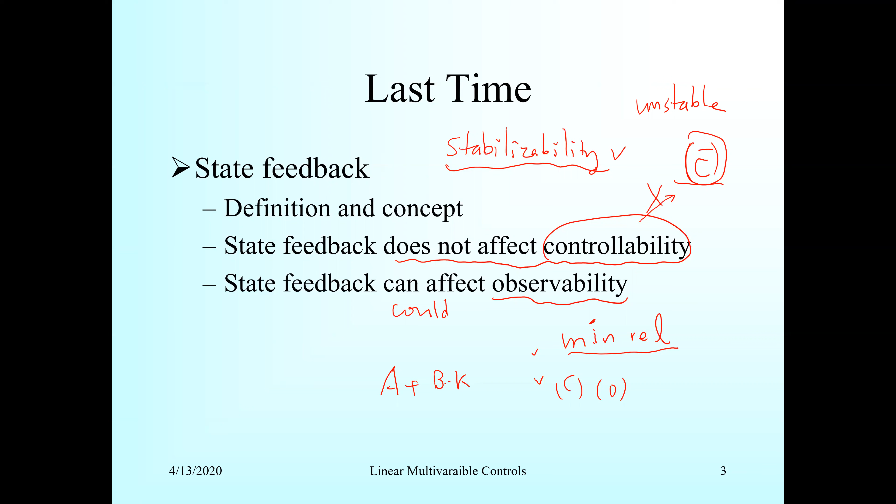So to talk about stabilizability: if you have A plus B K, the state feedback U is K X, how do you know that the K exists such that the overall closed loop system poles can be placed anywhere you want? The existence of such K relies on an assumption that the system is fully controllable and minimum. If we don't say minimum, then controllable is not enough, and you still have to say stabilizable.

That is already implying that your C-bar subsystem is stable. Then the overall system can be said to be stabilizable. I hope I'm not confusing you. So let's move on to pole placement.

Pole placement means you have state feedback, the whole state is available for you to do the feedback. But what if the full state is not available? Then we need to introduce observers.

In control, there are actually two steps. When you develop something, you ask: is this state feedback, or still feedback control? Then you should say output feedback. It turns out that output feedback is much harder than state feedback. On the other hand, state feedback is the foundation, so you have to know this one first.

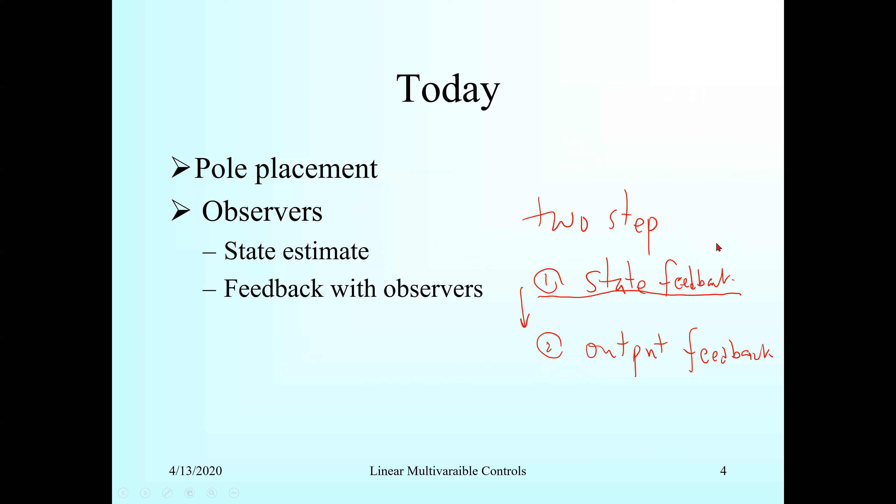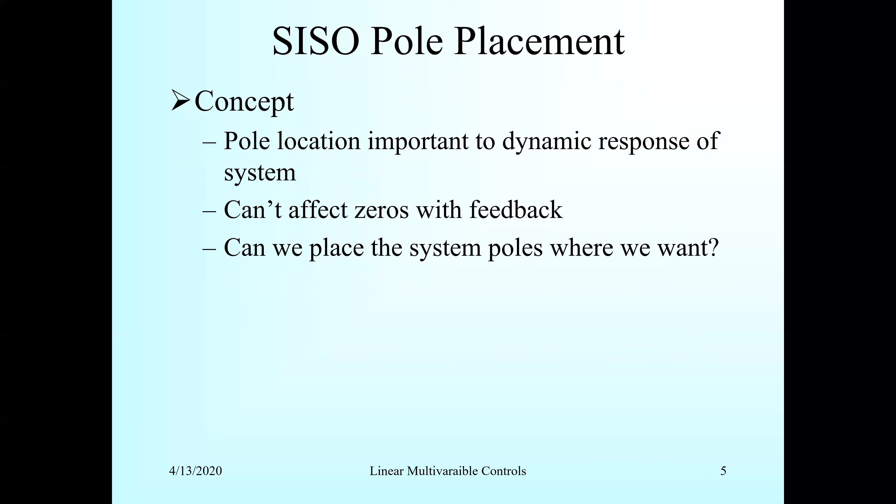Let's go to SISO, single input single output, case first. The pole location is important for the dynamic response of the system; feedback cannot affect the zeros, I already see that. Can we arbitrarily place the system poles? These are the questions - the same ones we should answer for the MIMO system.

So state feedback in the MIMO case: there are so many flexibilities there, because of the MIMO, you have lots of feasibilities. This is a journal called Transactions on Automatic Control, it's the number one journal in control.

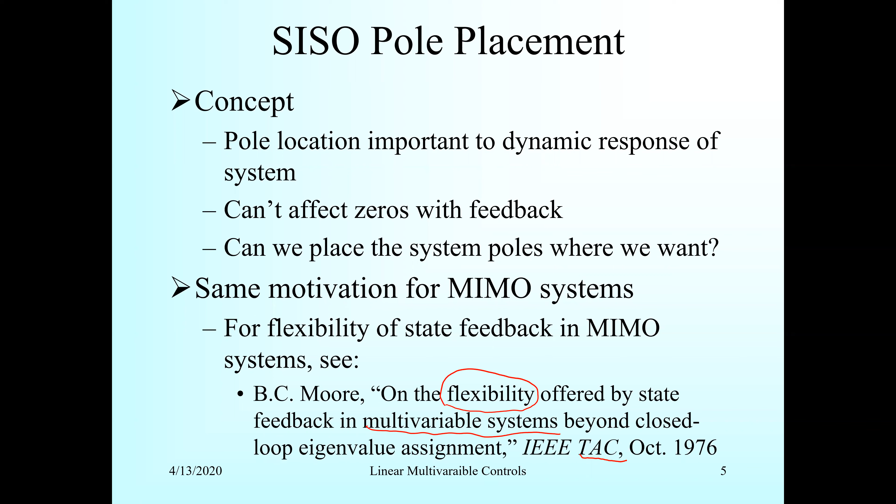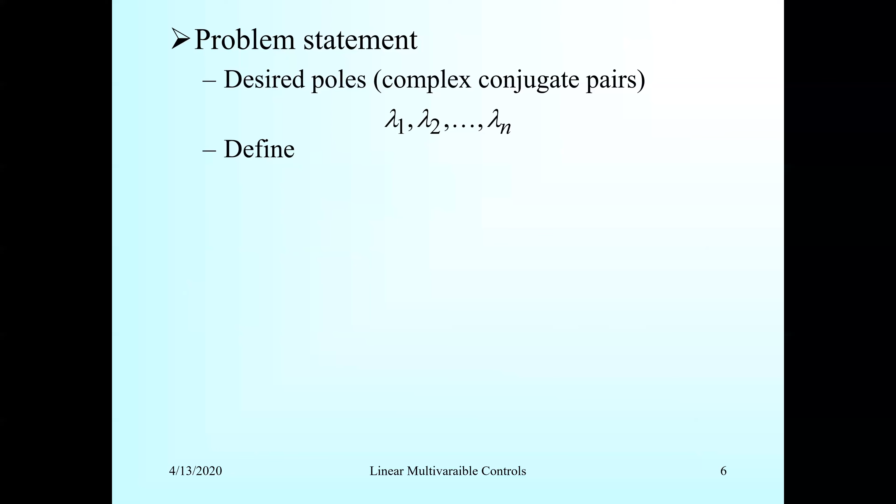Here's the problem statement: we have a desired pole, lambda 1 until lambda n. We define P of S as the open loop characteristic polynomial - we're talking about the SISO case right now. This is a polynomial P of S, with the highest term coefficient being unity. This type of polynomial has a special name: it's called monic polynomial.

So these coefficients are the open loop coefficients. Let's say the closed loop characteristic polynomial is A minus BK - in fact, we are trying to use negative feedback, minus K X. But if you say you want a plus, that's okay too, it doesn't matter.

That is a closed loop characteristic polynomial, and I have a desired characteristic polynomial. That actually has a notation called pi, i equals 1 to n, lambda minus... it's called S minus lambda I. So this is a kind of notation. The pi is a product notation and sigma is a summation.

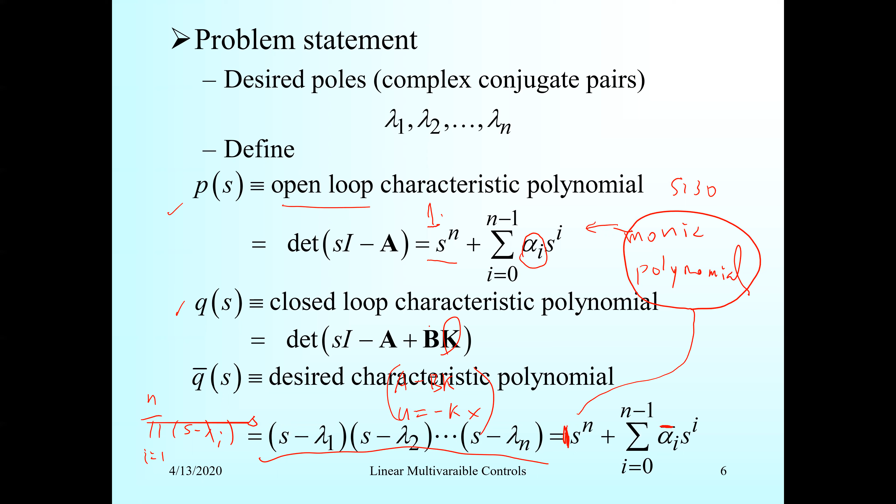So I want this, okay? This is an open loop, closed loop under K. Giving a K, you have a different Q. So can you find a specific K such that these are the same? Q is a closed loop transfer function. Characteristic polynomial is a closed loop. So this is actually dependent on K, okay?

And this is desired, okay? I want you to put, it's called desired. So this should be comma K, because K is your choice, okay? So the question is: find a K such that this is true, which is obvious.

Again, we are using minus Kx. It's a negative feedback as u. But you can define plus here. Doesn't really matter, okay?

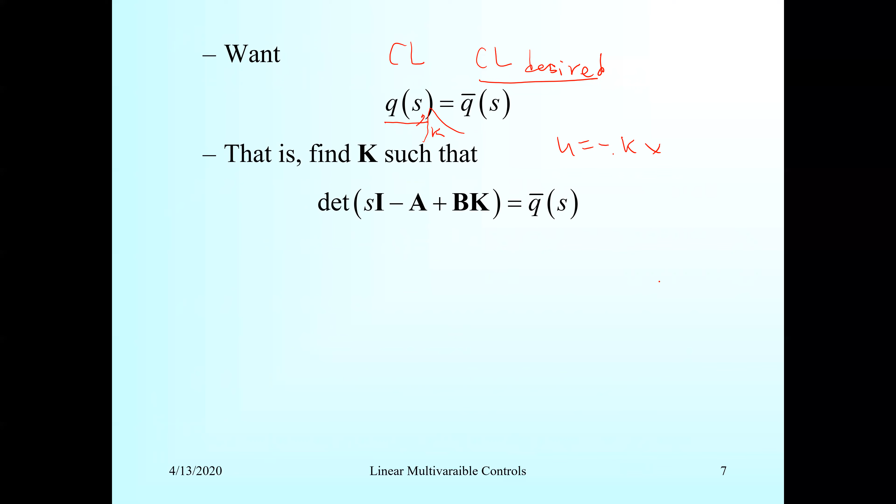So there's a theorem saying that if the original SISO system is controllable, it can be arbitrarily assigned by the state feedback, you can always do it. But the question is, what's the fastest way to check the controllability of a SISO system? What is a typical uncontrollable SISO system?

I give an example, okay? So if you have a system like S plus 1, S plus 2, so this is controllable, right? But if you have S plus 3, then here you also have times S plus 3. This kind of gets canceled out. So this pole at S equals minus 3, actually, you cannot change it. You cannot arbitrarily change that position. It's canceled out, okay. You're fortunate it's stable.

But what if here is negative? So then this system is what? Not stabilizable. Make sense? Because that position cannot be changed. It's plus 3 in the right half plane. You cannot change it through feedback. So it's not stabilizable. So I just gave you a rough idea of what an uncontrollable SISO system looks like, because it's a cancellation of a stable pole somewhere.

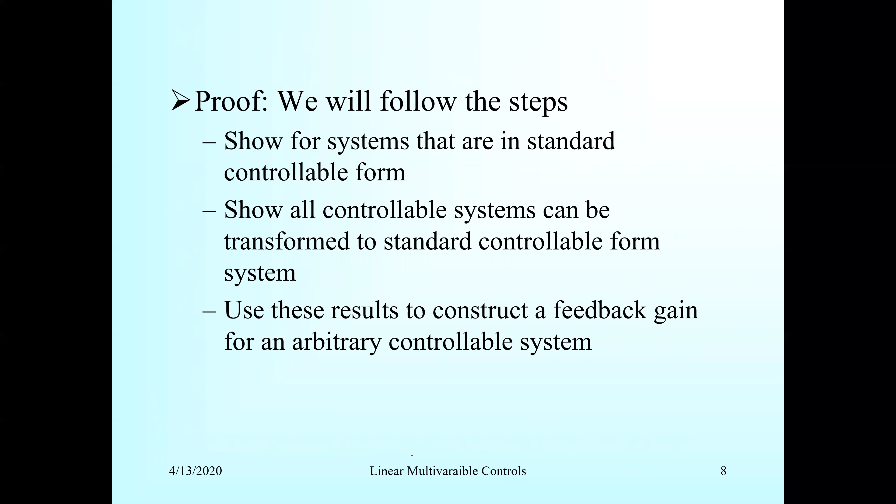So standard form, so we know it. This is our standard form. So this is alpha, is my what? Is my open loop system, okay? Open loop system. So closed loop system, then I'm going to have BK, because my B is only here, okay? Only here, the last one. So this is to me like a chain integrator, okay?

So I hope you will visualize the chain integrator. So basically you will have something called x1, x1 dot is x2, x2 dot is x3, right? So it's a chain of integrators, okay? Until the last one has a control u(t) here, plus equals xn dot, okay? So you have a minus alpha 0 x1, and okay?

So that's why I can recognize this is this. Sometimes people write I n minus 1, okay. So it's a chain of integrators, okay.

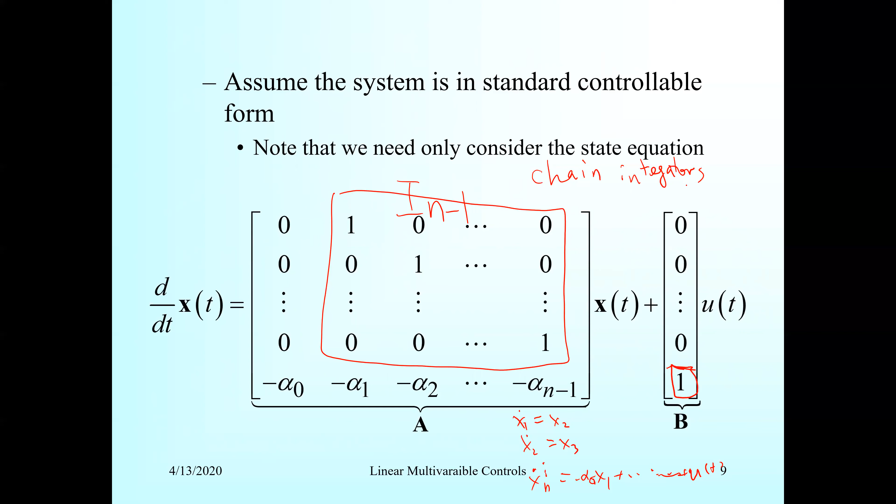Then closed loop without reference. Without reference, what does that mean? The reference is 0, so your origin is your equilibrium point, okay. In other words, I hope after everything, x infinity is 0. So when time goes, then we can talk about when this is not 0. It's okay by shifting, doing a variable change.

So with this K, we can assign anything we want. But what if you have a reference like BR(t)? This is called the desired closed loop system without a reference. Then you have this one. So then your control objective is to bring your x(t) to 0, to the equilibrium point, as t goes to infinity.

And how, like in a 2D system x1, x2, how they get to 0 in here, x2 here, it is always exponential decaying. So it is not only asymptotic, but also exponentially stable.

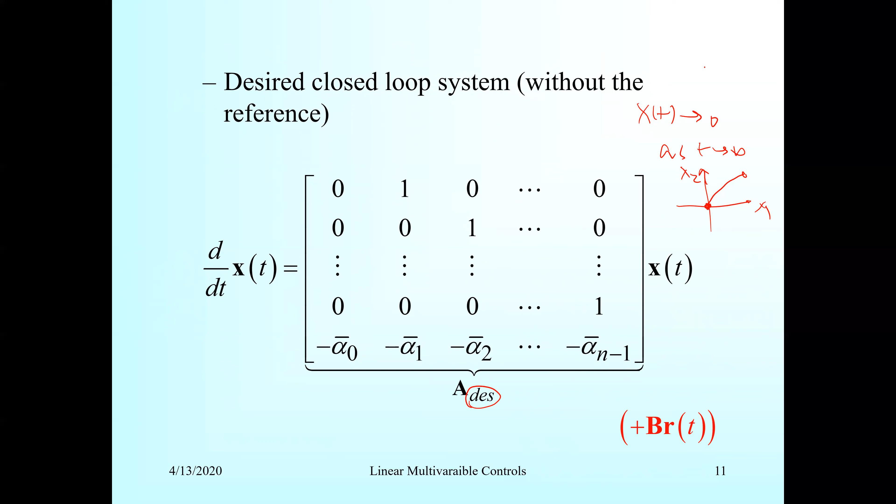But as we write the design, this is desired. So if you have a reference, you just add it in there. This doesn't really matter. So then your x will go to R. So this actually can pick state feedback K. You can. So this is called a proof.

After you finish the proof, you actually constructed a way how to pick the k. This process is called a constructive proof. So then you can construct the k through that.

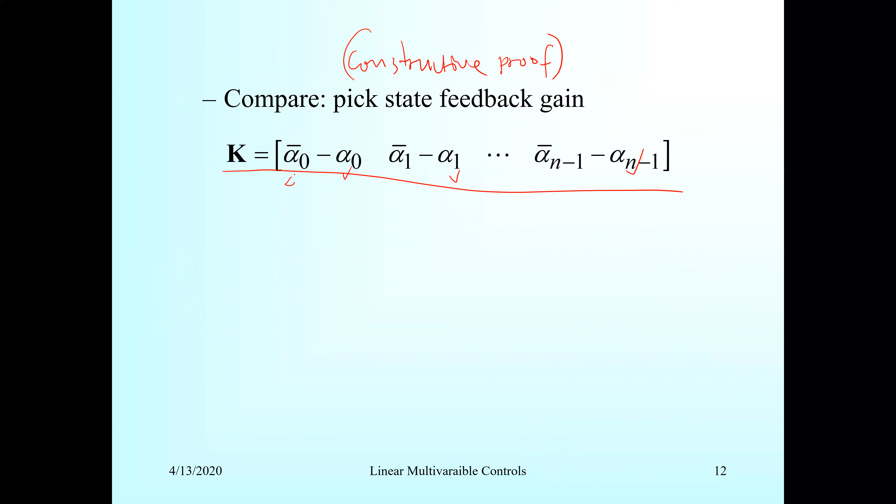So this is the original coefficients, and this is the desired one. The difference is the k. So you put this one in, and these two will be the same. Thus, this is true. Okay, done.

So we can place the poles of a controllable SISO system in standard controller form at the desired location arbitrarily. Arbitrarily, we should say arbitrarily.

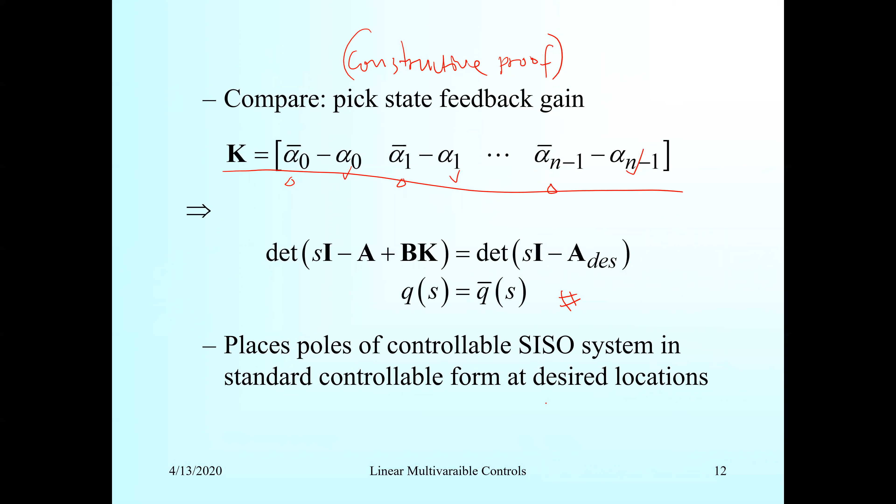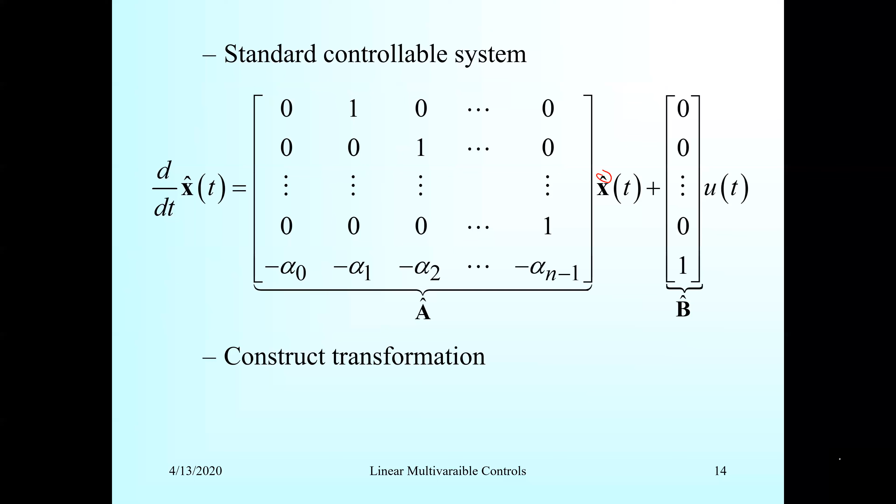Because the original x, you need to do a coordinate transform to get into this standard form. So you need to construct the transformation. It's usually a similarity transform, so you have a similarity transform Q here. Make sense? That's why you are under different coordinates.

So then suppose P is Q inverse, and then we can write this. So this is the original open loop controllability matrix, multiplied by this form. You can construct the P like that.

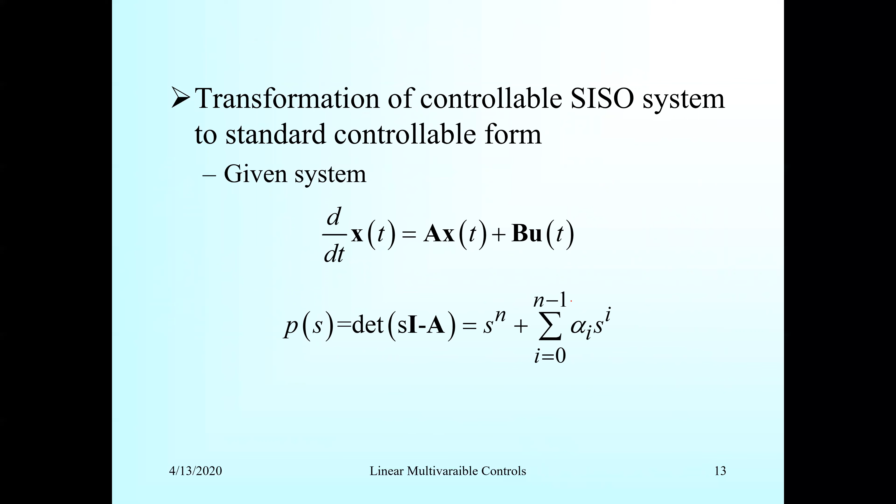And this is the characteristic polynomial coefficient of the original system, in the original coordinates. You have alpha. Then what do you do?

You construct this. But if you want to see why this construction is true, the John Bay book has a proof on this. We're going to look into the literature later.

So we don't get into this for too long, and we are going to work on this after the end of the lecture today. It's page 326.

This person is called John Bay. He has a very nice state space textbook on LTI systems.

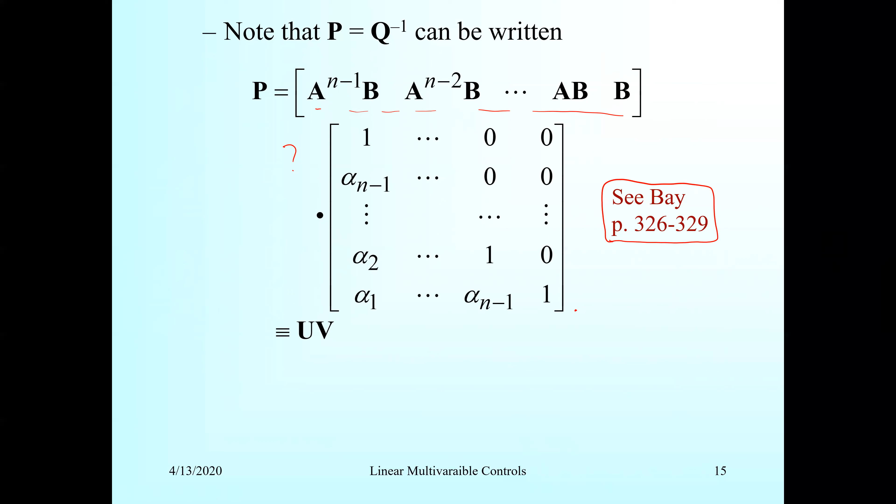So we assume this is written as U times V. It's invertible because this system is controllable. Why? It's full rank, all right? It's full rank, and this is also full rank.

So because of this construction, do you guys roughly know stuff like this? So you can see this is the same, this is the same, this is the same. This matrix format is called a Toeplitz matrix.

This is a special Toeplitz matrix, okay, a Toeplitz matrix. I think in one of the lectures I derived this thing for you in terms of FIR response.

Determinant is 1, so both of them are invertible. Therefore, P is invertible. So you get the inverse of Q, so you have this one.

So how can you get out the A hat? This is the original A, this is the A hat. Is that standard form? So that's A hat, that's B hat.

So this is very elegant and beautiful, right?

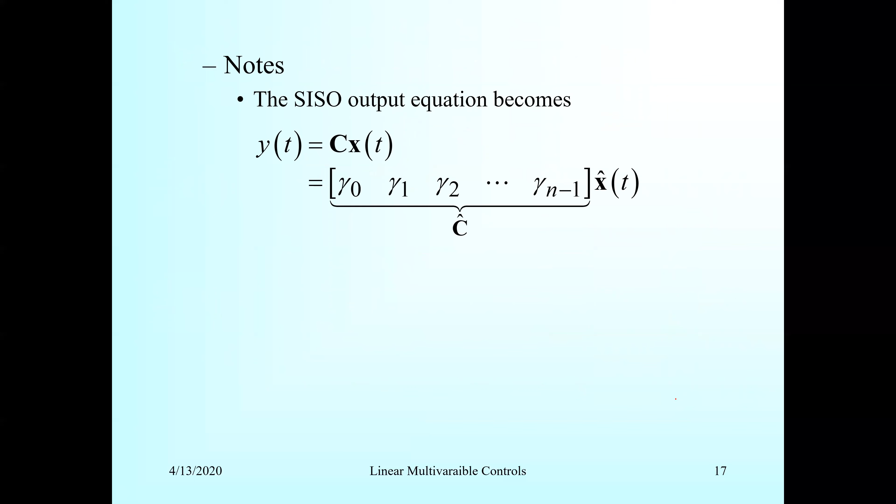Because we are talking about the SISO output equation, what is this format? This format of the numerator is the numerator polynomial coefficients of the transfer function. So this is left for students. We have learned this before, right?

So because A is a special form, B is a special form, but C would be the coefficients of the numerator polynomials.

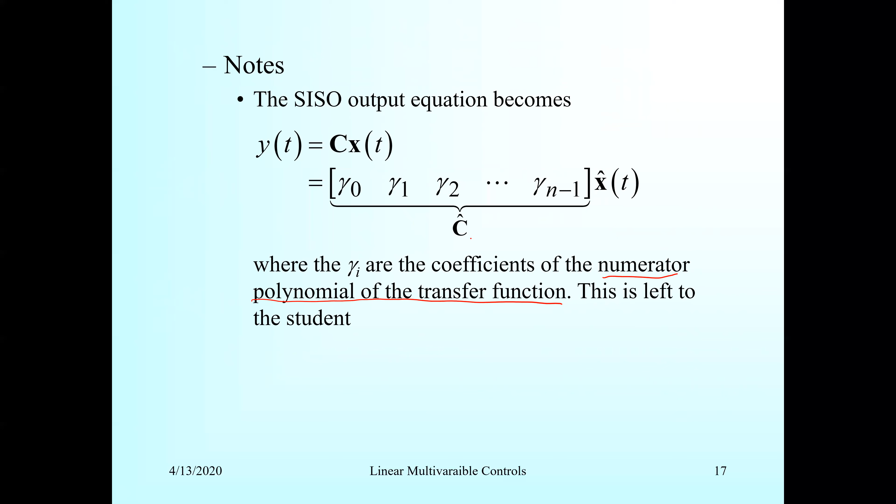So this procedure works for MIMO systems if it's controllable from the first input. Okay, MIMO.

So now we got a taste of SISO system pole placement. If it's controllable, then you can arbitrarily place the poles at a desired location through that procedure, mainly through the controllable standard form. But for MIMO, we have very similar results.

So it's true that if you have controllability, then you can arbitrarily assign poles by state feedback and make the closed loop stable. You can arbitrarily assign that.

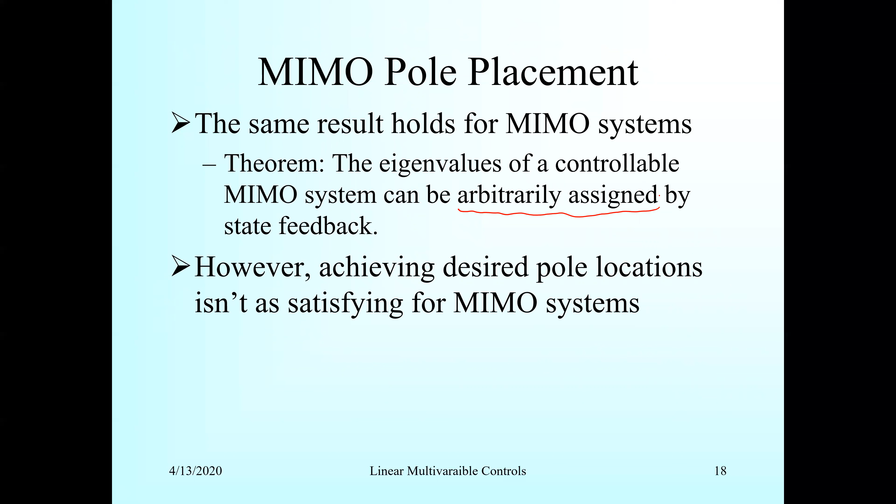Achieving the desired pole location isn't as satisfying for the MIMO system, okay? Why? Because it's not like in the SISO case.

In the MIMO case, it's not like adding together multiple SISO systems. That's the wrong idea, okay? There is something called coupling between the subsystems, the SISO systems.

So in mathematical language, the response is not only dependent on eigenvalues, but also the directions, the eigenvectors, which contain all the couplings. Therefore, achieving a desired pole location usually is not enough.

But you know how to do it first. Then we talk about whether this location is good or not. Okay.

So what is a good location? That's the point. Good locations, when they are good locations - that's a separate question regarding design performance issues and especially optimality issues. So they said, you give me a desired location, I can achieve that desired location. But another layer of question is how these desired locations were decided. That's a design question about performance driven and could be robustness driven. So there are two questions: optimality and robustness. These two will drive how you choose good locations.

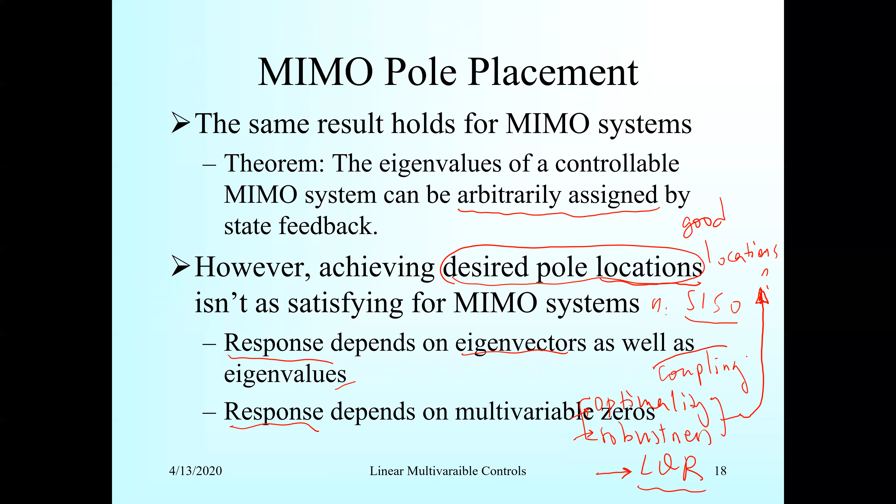If we only care about time domain responses, it is actually because of this coupling issue that you cannot simply use pole location to answer this response performance issue. In other words, even if you can place the pole at the desired locations, your response could still be very bad, because the response is not just pole locations - it also, surprisingly, depends on the zeros of a multivariable system. Not so long ago, this topic, multivariable zeros, was still topical research. Even in the robust control course, ME 2012, we spent a long time talking about multivariable zeros.

I'm sure I don't have enough bandwidth time on multivariable zeros, but you should just know that for the philosophy of MIMO pole placement, even if you put all the poles in the desired pole location, you cannot guarantee a good response, because the response depends not only on the eigenvalues and eigenvectors, but also on the multivariable zeros. This is a little bit surprising, but I hope in linear multivariable control we should have a multivariable thinking.

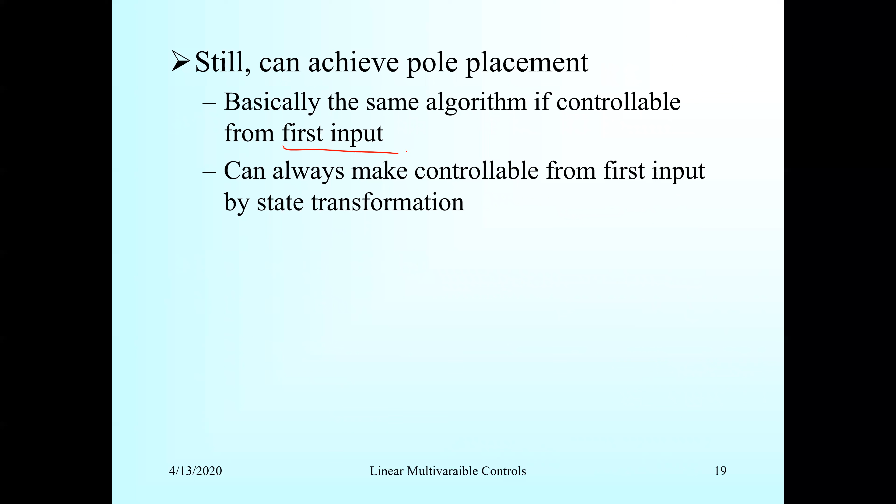From this point, I want to emphasize this: let's achieve a pole placement - that's probably only the first step, there are many other things. Basically, we can use the same algorithm. If controllable from the first input, you can shuffle the states through state transformation so that the first input becomes controllable. If it was not controllable from the first input, you can just arrange it so it is. Only the first one needs to be controllable, which is very interesting.

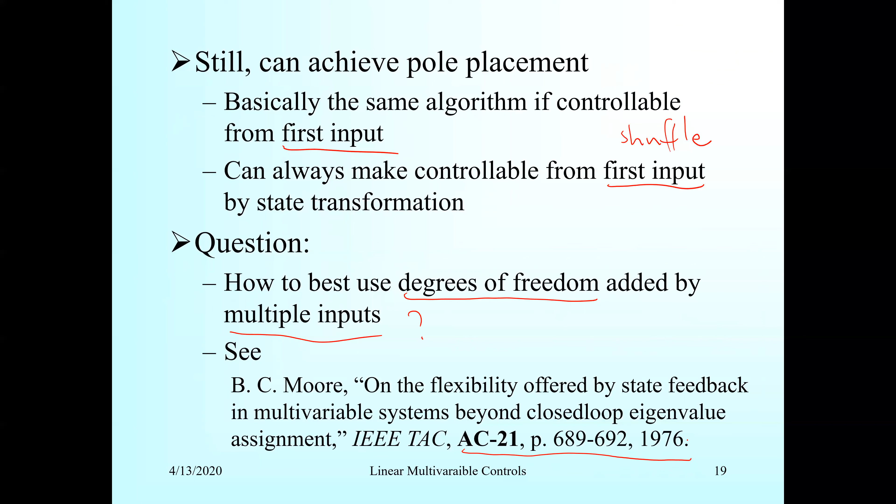So the question is how to best use the degrees of freedom added for those multiple inputs - that's a very good question. There are more requirements you can add on this, and that's addressed in a paper here, but we're not going to go into that detail. So that's for state feedback using pole placement. At the end of the slides, I'm going to show you a set of MATLAB commands that can do pole placement automatically for you.

So what if all the states are not available? Then we need an observer. That means X is not available - you have K, you multiply X by the gain to construct U, but if X is not available, you have to have an X hat, an estimation. So how do you estimate, and based on what? Based on Y, based on U, your input and output. So let's see officially, what if it's not available - you can do the estimation.

So then the observer - you sometimes call it a reconstructor, because you are trying to reconstruct the state from available information, which is Y and U. So it's called X hat. And then we can use the X hat to generate the control. So that's our state feedback, I hope you understand.

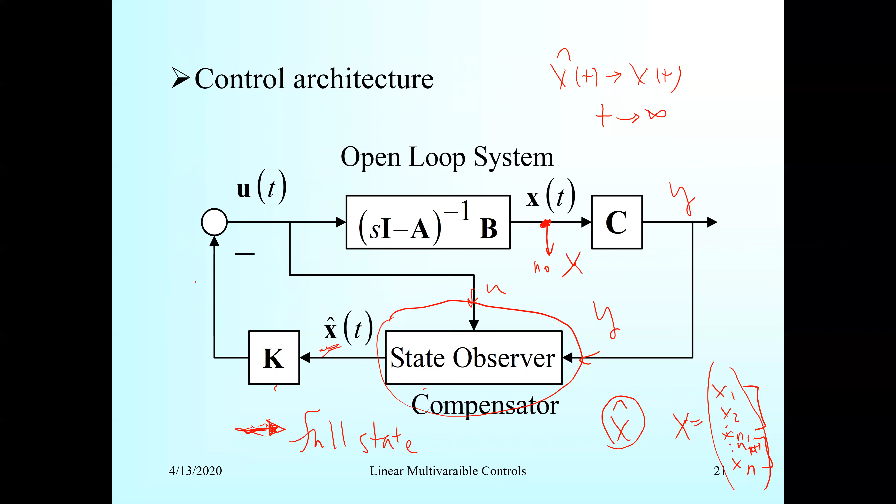So this is called observer-based control. And also here, you can merge this controller and estimator together as your controller. Together, this is called observer-based control.

So this shaded yellow area is called your closed loop controller. So it's open loop, like a G of s, this is a C of s. Of course this is a MIMO, in the MIMO. This is also a MIMO.

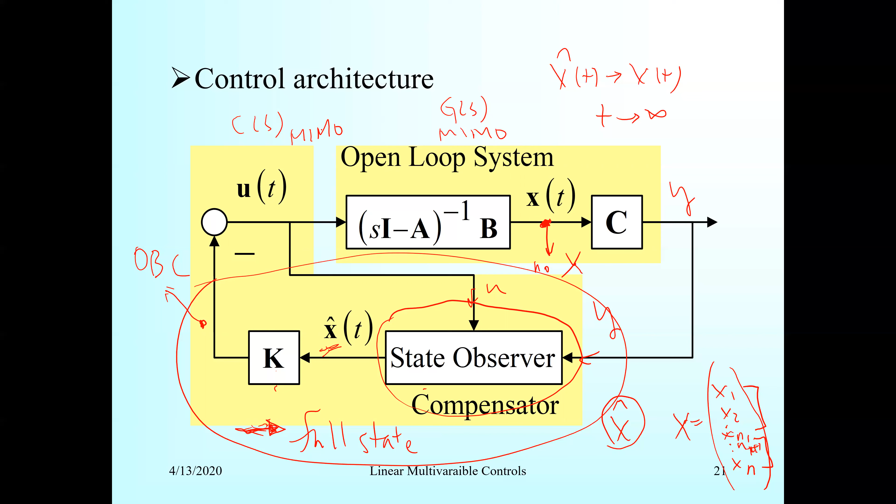So that's the separation of open loop versus your estimator and the controller here. So what do we want to achieve? I'm going to come back to my two questions about controller design: what do you want, and what do you have? Now in the observer design, I also have two questions, the same.

What do you want? I want this state and estimate to be the same if all data are known, okay, estimate approaches the state. Otherwise, you have stable error based on the state observation and the quantitative evaluation of error, so you know what the error is. We usually define the error as x(t) minus x hat(t). That's the error, called observation error.

So let's go a little bit. This is an open loop system, and I have this measurable. Of course this is also because you apply this to control the system. You have this information, this is what you have. So what do you have? Also you have A, B, C exactly.

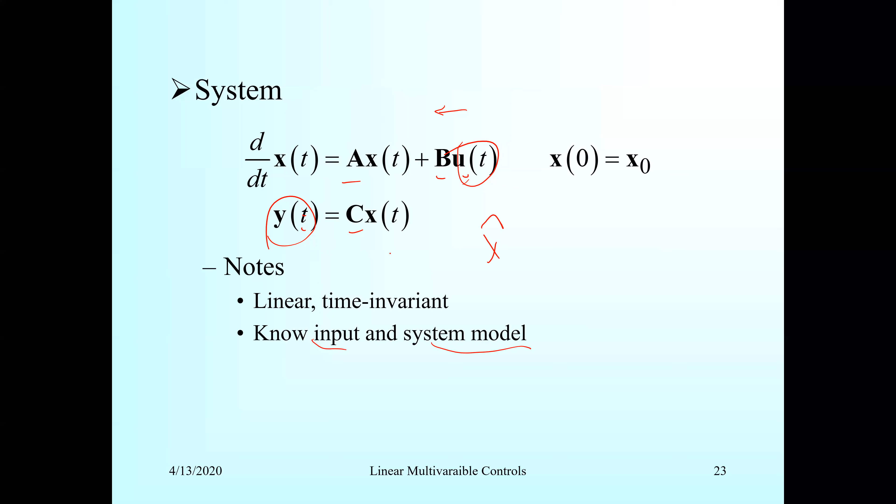No feed-through, meaning the D of U here, we don't have this one. This is called the direct feed-through term. Results are still valid if presented with the derived output, so if I have D times U here, we simply redefine the output Y like this. Then we discuss without D, so it's not a big deal.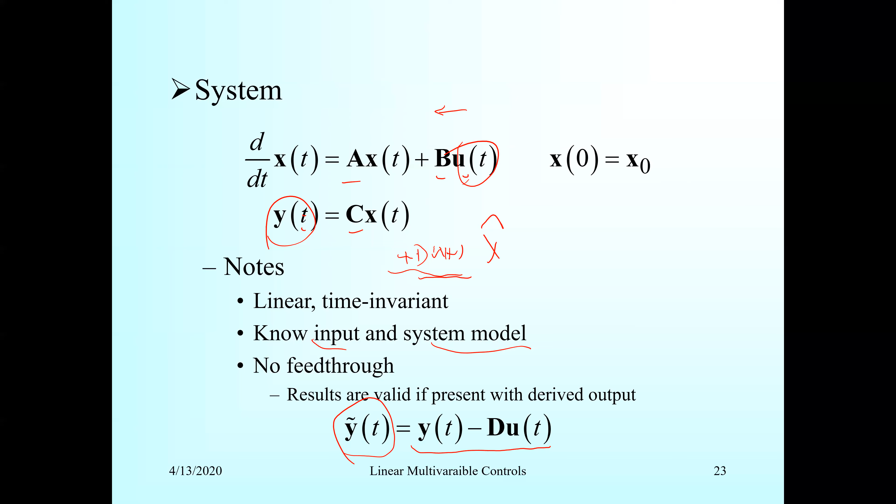So the observer structure, look at this: there are two parts. The first part is to make a copy of the original dynamics. This is making a copy of the original dynamics.

If L is 0, that depends on the initial error. If this initial guess is the same as my original true state, if you set them the same, then everything will be the same, because I'm running in parallel with the original system, making a copy of it. But you don't know x(t), so you also don't know what x0 is. Therefore, this is not a realistic assumption.

But if L is not 0, we can asymptotically make it converge. So if L is not 0, it's still true, this is still true.

So let's talk about feedback of observation, meaning the second term here — this is called a prediction of my y hat, based on my estimated x, so I know the estimated amount of my y. But this is my actually measured, real system known output, so there must be a difference. I add the difference to correct my x.

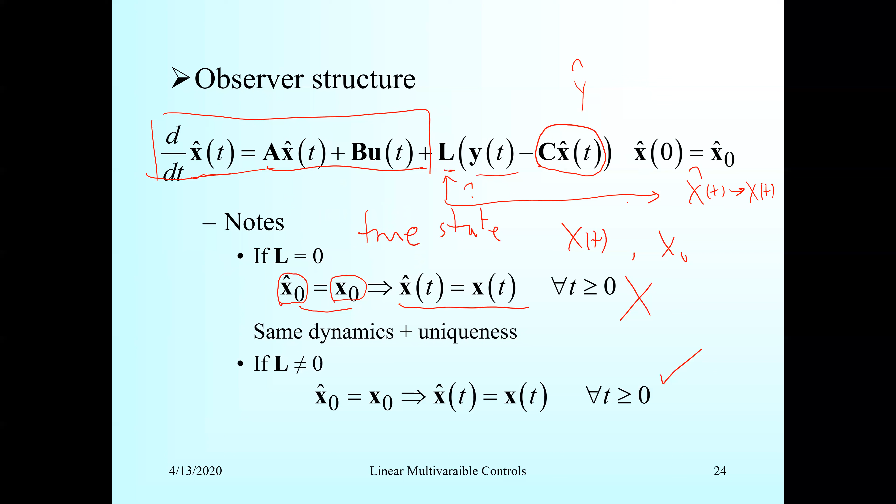In a way that I choose L properly. So how to choose L properly, such that my x(t) hat will converge to x(t)? That's dependent on L. If L is not chosen properly, that's a problem. C x hat is y hat. The construction of the measurement, if estimate is the state, then the term is E Y — this is the measurement error, prediction error. It's also called prediction error.

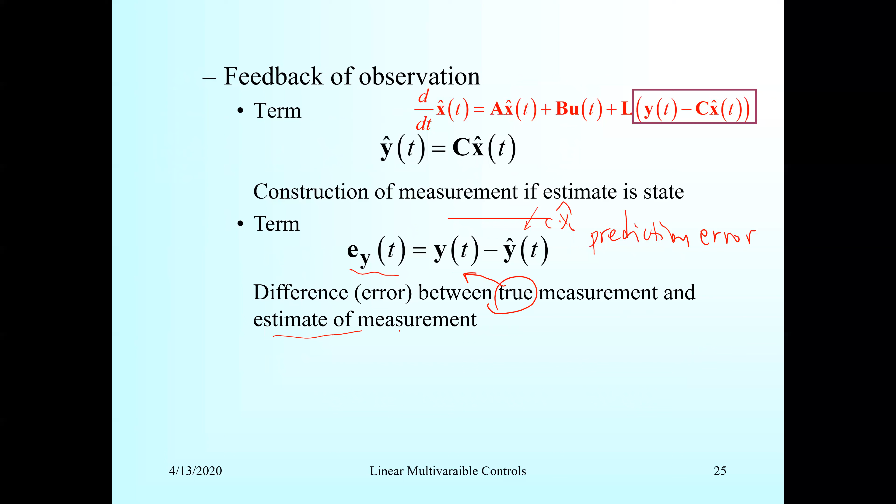You basically estimate your x, so based on that you can predict your y: c times x. The difference is EY, which has a name: prediction error, or output prediction error, between the true measurement y and the estimation of the measurement.

So that's one term. Another term is L times EY, that's feedback of error. We use this error for the difference between true measurement and estimation of measurement. We have EY times a gain here, and this needs to be properly chosen, then fed back through this differential equation so I correct it.

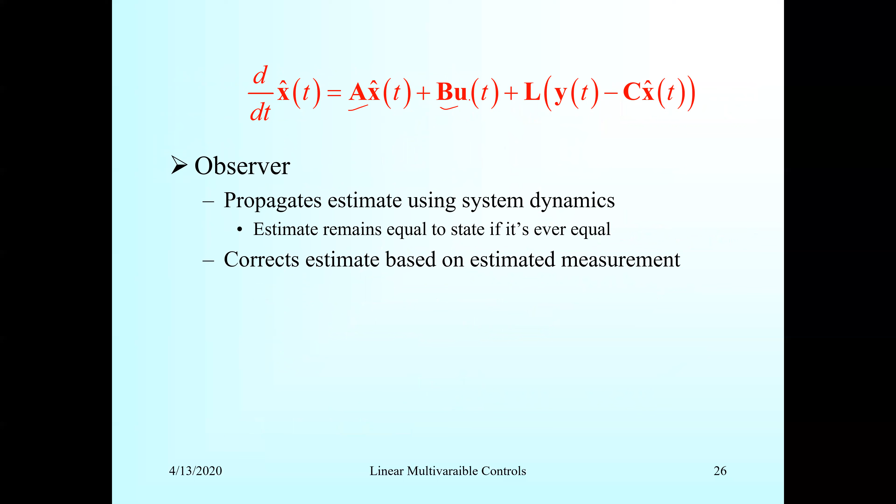This is called propagation of estimation using system dynamics. So these are the same: the system dynamics, I propagate it. The estimate remains equal to the state if it is ever equal, once it's the same it will always be the same. If they are not, then we correct that estimation. So the question is, will this work?

What is the error dynamics between state and estimate? So x and x hat, the error of it. They use EY, probably they can use EX. Let's do estimation error. They used E. Estimation error dynamics will be DE/DT.

So this is true. If you feel this is hard to swallow, using this one and you have another one here. Remember, E is true minus estimate. So my true will follow my DX/DT equals AX. This is BU, the same, nothing else.

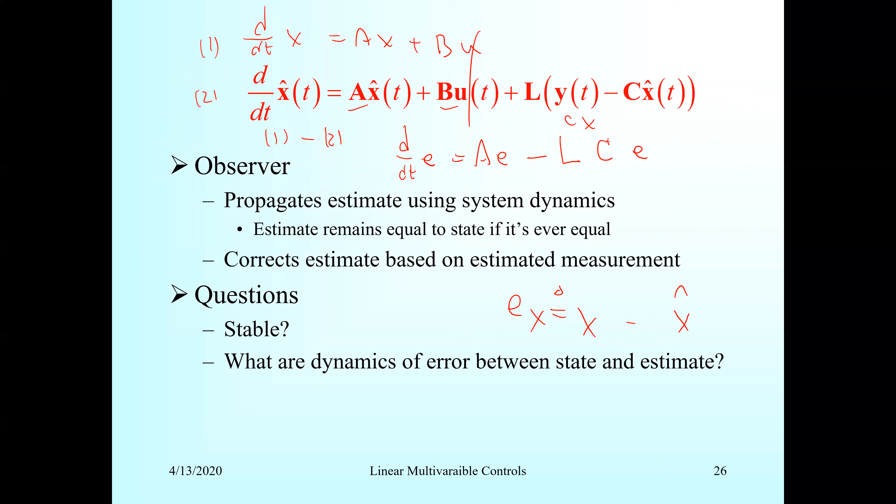So if I use equation 1 minus 2, I'm going to have DE/DT equals AE, this one cancels out. So I have minus L times C times E, because this is CX, this is CX hat, so pull out the C, you get this one. L times this system, cancel out, you have LC here. So this is a E, this is another E.

So that's my dynamics here. Whether E will go to the equilibrium point 0 depends on the eigenvalues of this matrix. So you have freedom to choose L such that this is stable. Then you may have eigenvalue position, and is it possible to arbitrarily assign the pole positions by choosing L here?

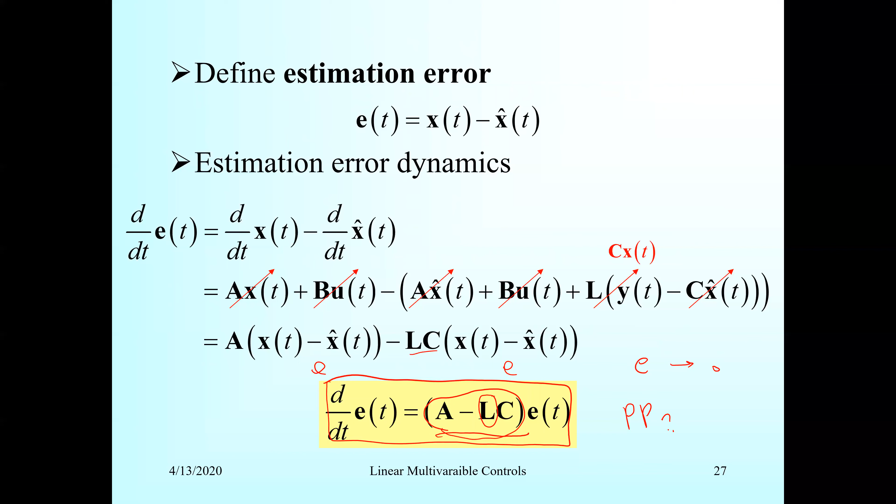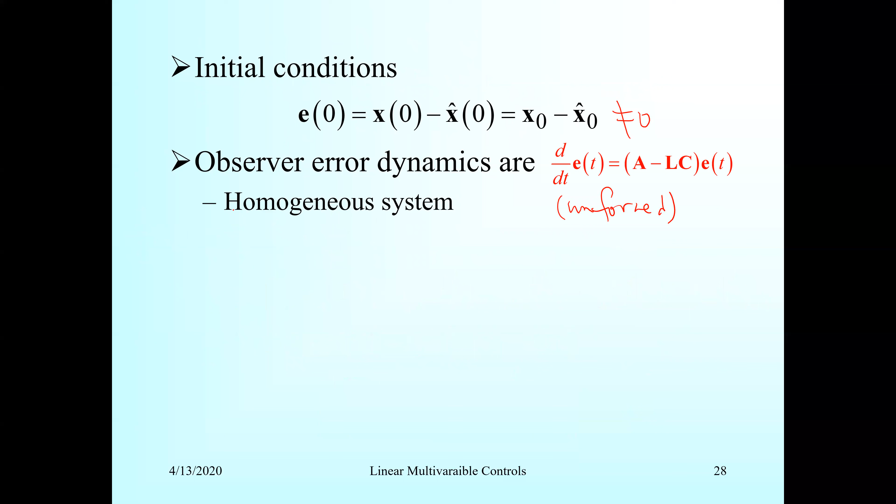Pole placement, is it possible? That's the question. Initial conditions may not be zero. The error dynamics will give you this, and there's no input, it's just a homogeneous system without control, it's unforced. Sometimes people say homogeneous system to mean unforced system without input. In this case, eigenvalues govern the response.

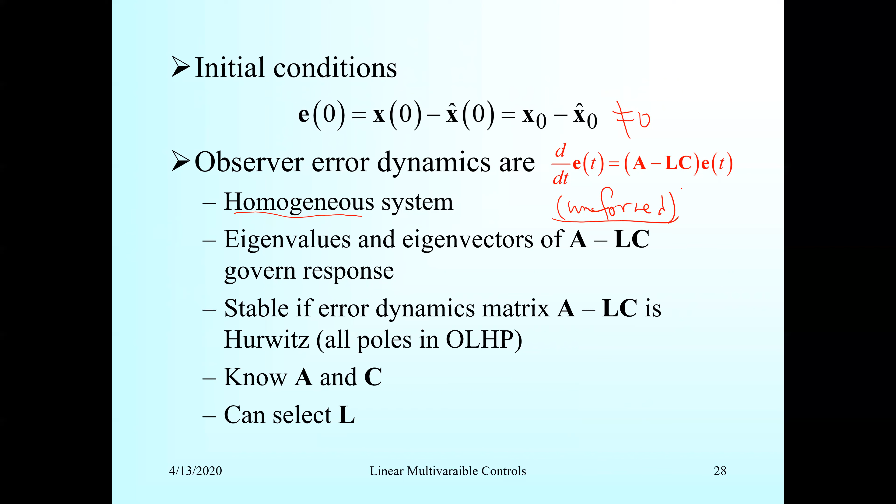Stable error dynamics means Hurwitz, so all poles on the open left half plane. We know A and C, and we can select L. But the question is, can we find out if there exists such an L? At least you can choose one, maybe the choices are empty. So there must be something there.

So you can imagine what we want here: estimation, you can say is observe. We are trying to observe X hat, and this is based on input and Y here, so this is a signal flow. We are trying to observe X, reconstruct X, and in the end whether we can do it or not is connected to eigenvalues, pole locations, eigenvalues of this matrix.

Arbitrarily placed: the condition is the A, C pair is observable. This is beautiful, right? So if A, C is observable, then we know that A transpose, C transpose is controllable. We have learned this one called a dual system. So as if you write something like Z dot equals A transpose Z plus C transpose U, this is a controllability, this is a controllable pair.

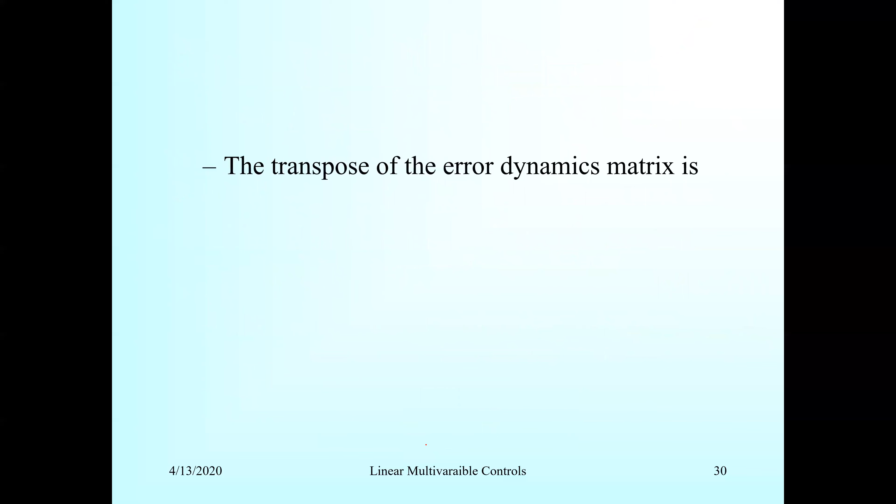So that connects to the previous discussion about pole placement and controllability. In other words, if AC is observable, then this is controllable. If this is controllable, this matrix's eigenvalues can be arbitrarily placed. So if you set this one, the transpose of the dynamics matrix doesn't change, it's the same, since a matrix has the same eigenvalues as its transpose.

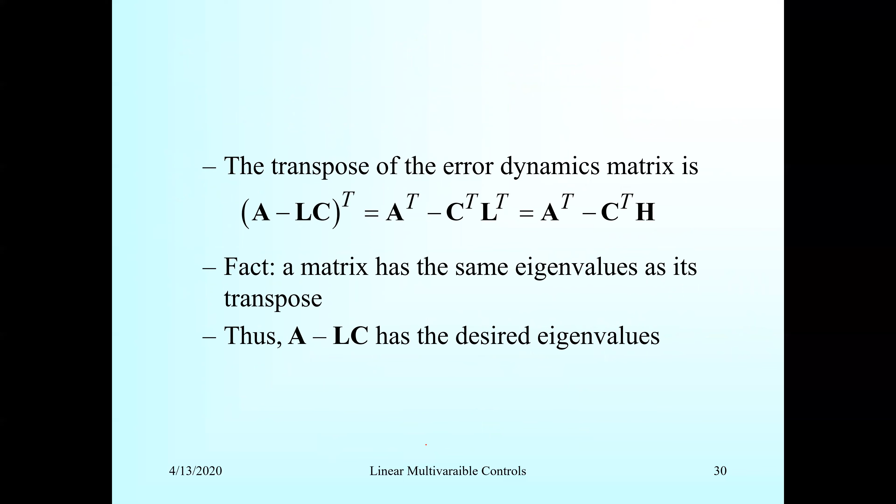So A minus LC has desired eigenvalues, arbitrarily placed. That's called state estimation. I hope you guys can capture what we just said on this. Dynamic output feedback.

Usually we can just combine. I put a circle previously here with estimator as K, x hat, and x hat has dynamics inside. So in this case, the controller C of S is not a static gain anymore. You need a dynamic system, a dynamic controller, not a static one.

So that's called dynamic output feedback. This is U, this is Y, this is a disturbance. Control is state feedback. This is static feedback, okay, static.

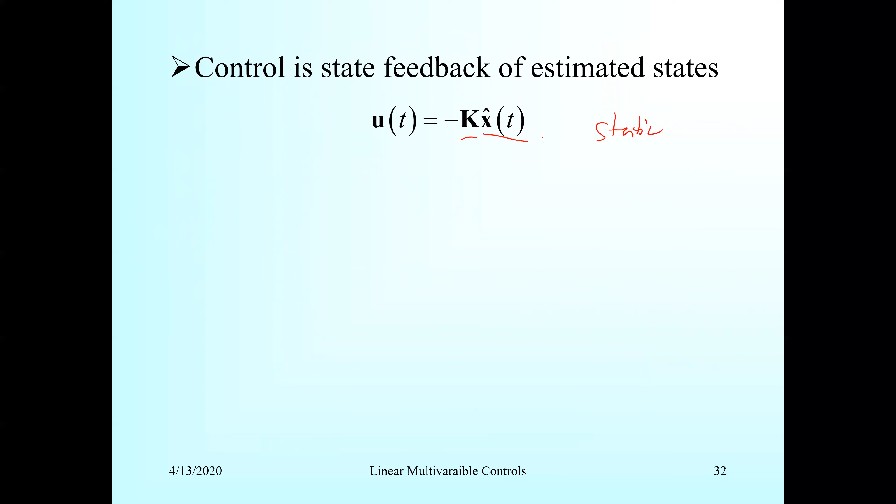For the X hat, however, X hat has dynamics. So let me draw something here. So you have, in here...

So it's no longer KX, it's like K, let's use C. C I J of S matrix, then it times Y, okay, times Y. This is Y. So from here to here, I'm using a C I J of S.

Of course, you have a realization of a state space form. But from a signal flow point of view, you got a U coming over here. From this red box point of view, you have a U and a Y coming in, coming out at X hat. But inside here, you have a BU. This is the same structure I have.

And here we have feedback, LC, minus LC. So this is a summary of a block diagram of an observer-based state feedback, or output feedback.

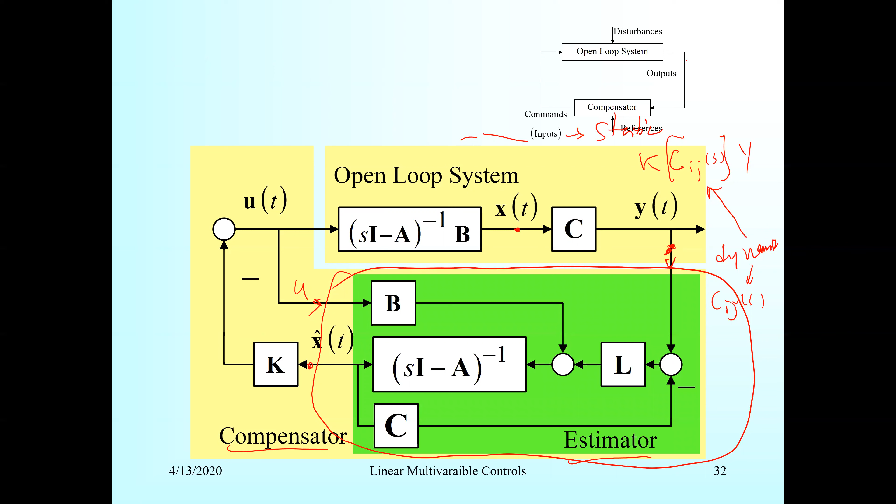And this dynamic controller, zoom in, you'll see a structure of an estimator and a gain. Together it's called a dynamic compensator. So this is the estimator. I hope everybody can remember this type of structure.

So by equations, we write this original input-output system, state space realization of G of S. And then we are going to have here, yes, because C X hat is Y hat, we merge this one into here. So this is my observer state space dynamics. So only the L is to be decided.

After that, you decide, so this is your control structure in equations. So in the augmented closed loop state, this A stands for augmented. So you put the original here, and this one is x minus x hat. So this is my state. I merge these two and write them together to see what's the structure of the matrix.

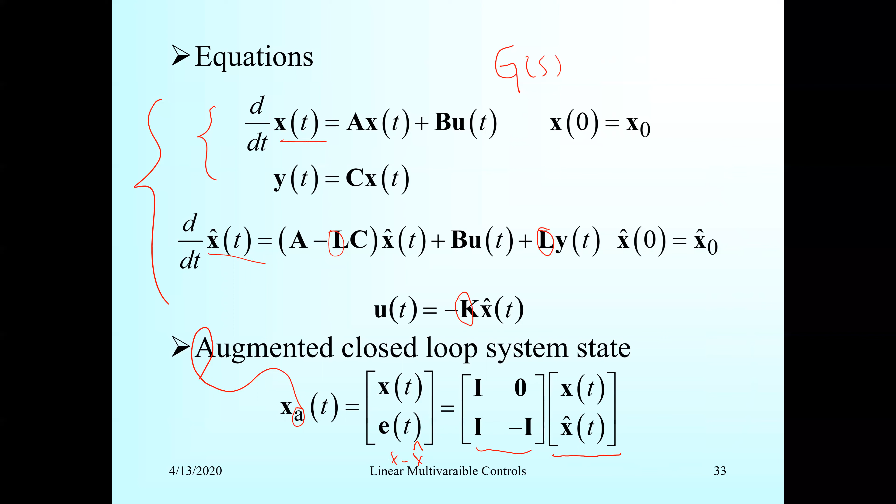So it turns out that I can write it like this. So basically, this is writing x minus x hat, the x minus x hat. But this one is, of course, fully invertible and full rank. So I'm going to write the closed loop system.

So D is like that. So this is called the dynamics. So the closed loop dynamics, we are going to write like this. So this is my U.

And the X hat itself, we can add and minus, add and minus. So it's good, so add one of this minus, add this minus. So this is 0. But because of that, I can borrow this one. One is to this one, one is to this one. This is E, BKE.

So overall, I can write XA is something like that. Because I only want to leave E in here, closed loop system dynamics, closed loop. So I don't have U anymore, right? The U is in terms of X hat, in terms of E. So in the end, I write this as XA.

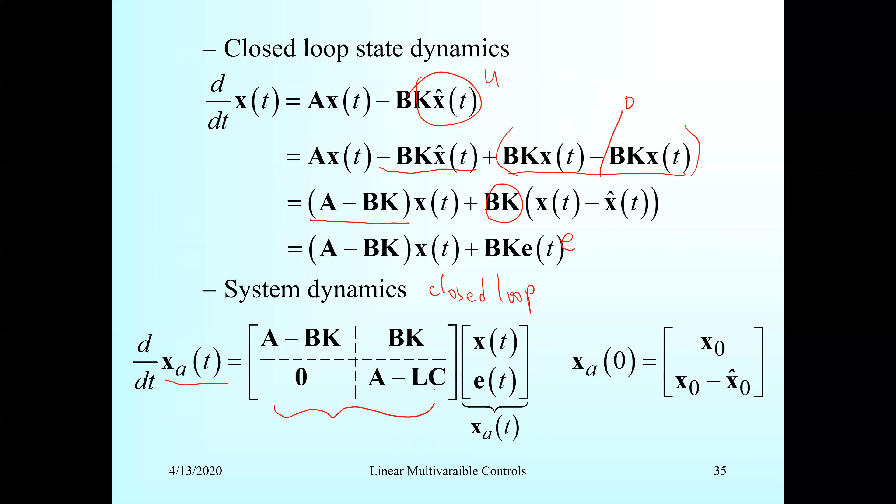So we want to study the behavior of this system. So compensator transfer function, then what that means is from Y to U. So what is the output? If you have a compensator, your output is U. Your output is U, and I'm going to find out the transfer function here.

So then output is U, this is output in terms of a state, the state is in terms of the estimated state. So Y is here. I want to see what's the C I J here. So basically I'm talking about the transfer function I want to know in this picture, from Y to U here. So from Y here to here, what is the transfer function? So I'm trying to say Y is input, U is output.

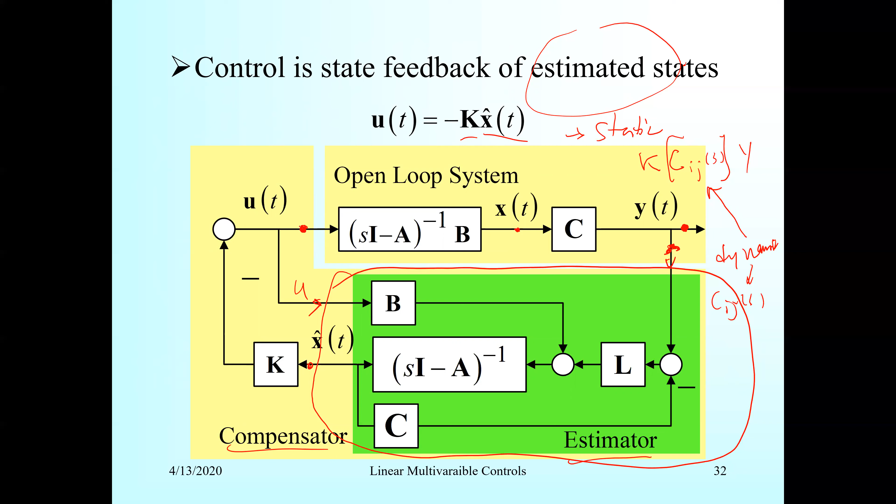So that is basically GC, is close. This is a compensator transfer function C, that is GCS. So the question is, what is the GP of S, the G plant of S. Of course it is open loop.

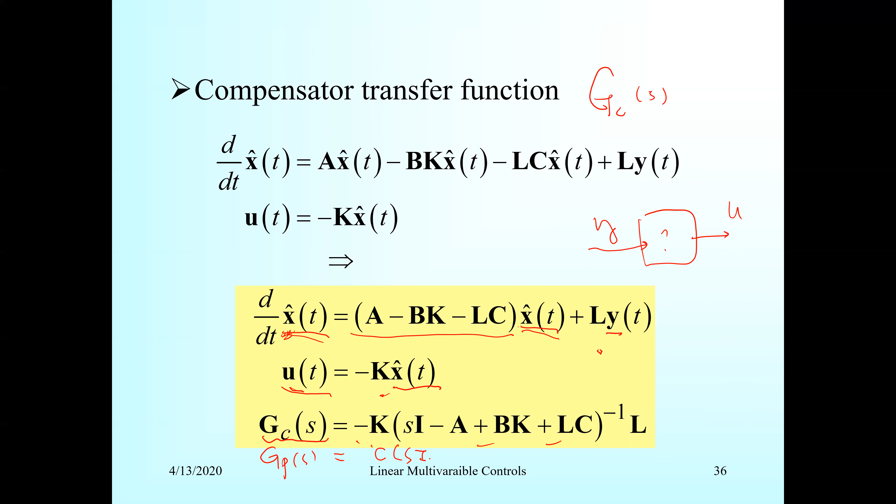What is that? It's C, SI minus A inverse, times B. That's compared to this. So you cascade this together, you got a GC, you have GP, then you have this one.

Closed loop. I hope this is not too much. And then what's the original states?

So let's write in terms of augmented states, meaning x and its estimation. So then we write in that way because I already can write this way. I placed y in there and inside, so this is the y.

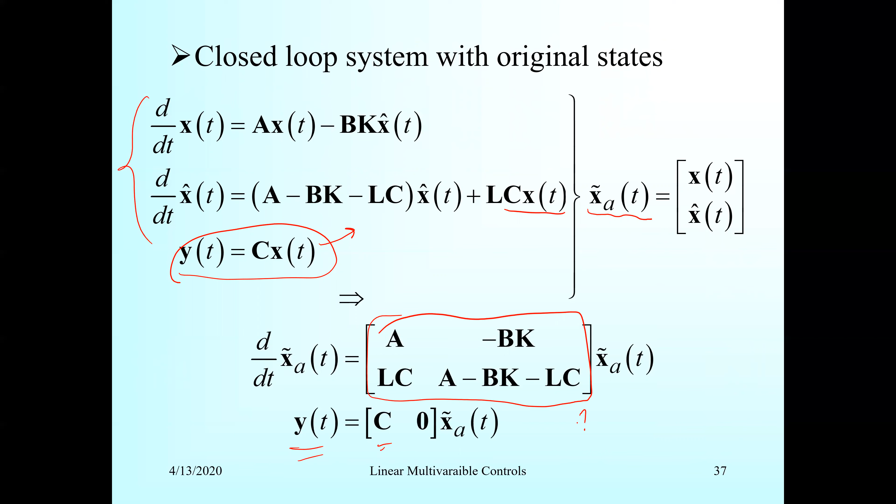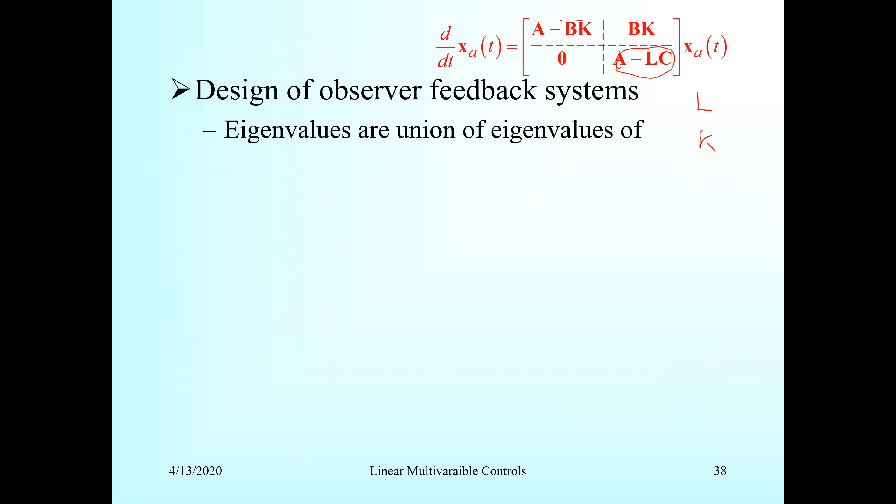So how to design this observer-based feedback control system? You have two things to decide, one is L, one is K. So obviously, if this is stable, if this is stable, then everything will be stable.

So you need to be able to place all the eigenvalues of this, and this is called union, all of them, to be on the left half plane.

So we can select the feedback gain K and, sorry, L. So you have two freedoms here. K is freedom, L is a freedom. So there is a separate design. In other words, you can design an observer and feedback gain in a separate way. So state feedback gain and observer gain.

So I made a small typo here by saying C is a design variable. No, this is not true. But however, remember, some time ago I told everybody, if you can design a C such that the system is observable...

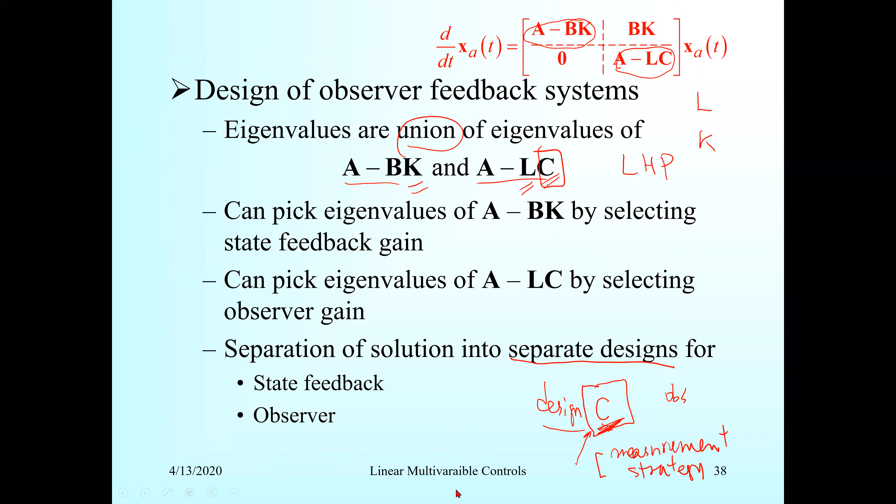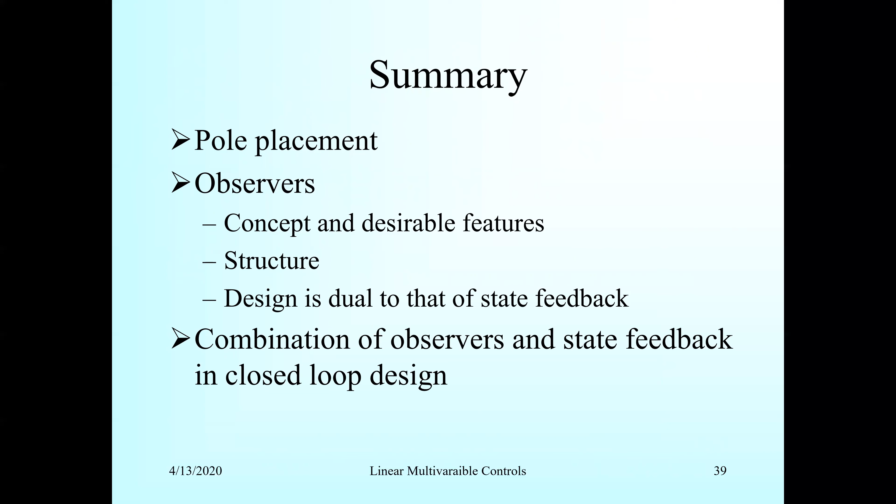So we can summarize: today we talk about pole placement and observers, and you need to place observers into a desired pole position, and in the MIMO case you have lots of freedom. So the observer design, we use the shortcut about dual system idea, so it's much easier. And then combine them to form the closed loop design, and you have a separate property, a separate design of the gain, one is K, one is L.

So in the state space control design, we have this, one slide of all the needed commands. So I suggest you help and study about that. Today we only did one pole placement design. This design algorithm is based on the IJC paper.

IJC stands for International Journal of Control, and that paper I also uploaded to this week's folder in the notes. So there are other variants. I think right now it's good for you to understand the pole placement, but there are many more like LQG, LQI. So I'm trying to cover them as much as we can, all the basics, especially the LQR and LQG. They have discrete versions.

For the pole placement, the article is already in our folder. The placement is like: giving A, giving B, giving... what is P? Can you guess? P is the desired or pre-specified location. So you do A and B, giving a P, I give you a K. That's the eigenvalue position, giving the eigenvalues, so you can decide the K.

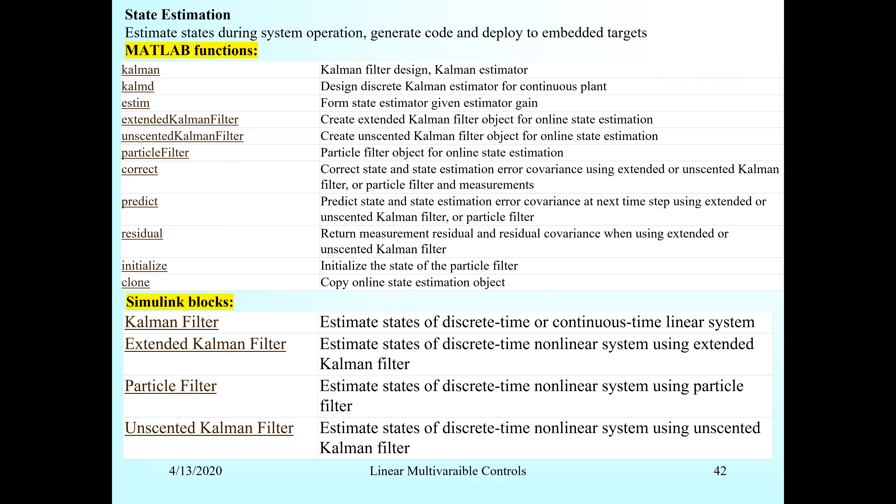And for state estimation, there are more like Kalman filtering. So what do we mean by Kalman filtering? What's the difference between Kalman filtering and LQG here? I'll try to clarify next week.

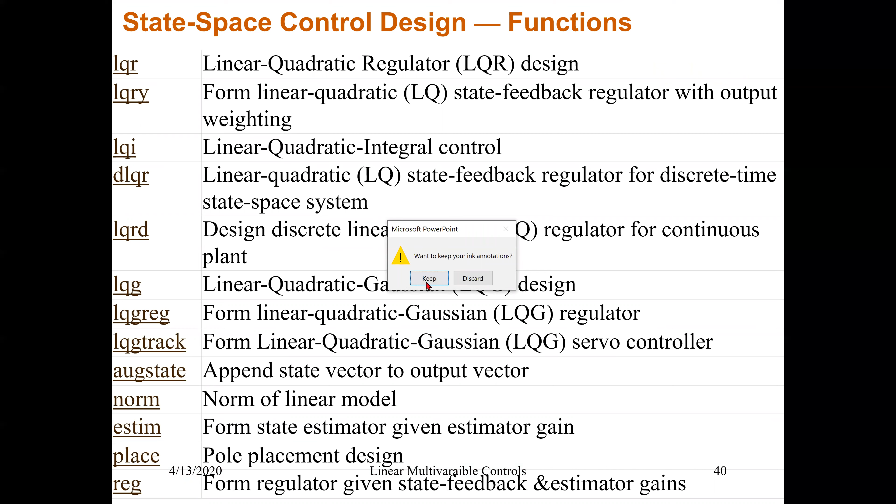We're talking about what's next. Next time we're going to do partial state feedback. Meaning some states are measurable, but some of them are not, so you need to estimate. That's called reduced order observer design. That's what we'll focus on next time.

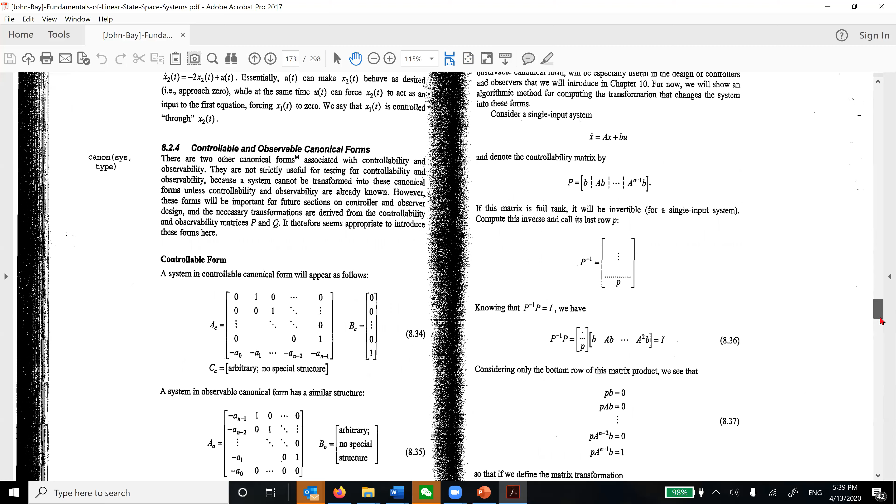On the other hand, I'm going to dig out this... why is John's book... oh, it's here. I have the full book, but I don't want to give it out somehow scanned. I can give you some chapters. They said it's page 326, that's 160... 326.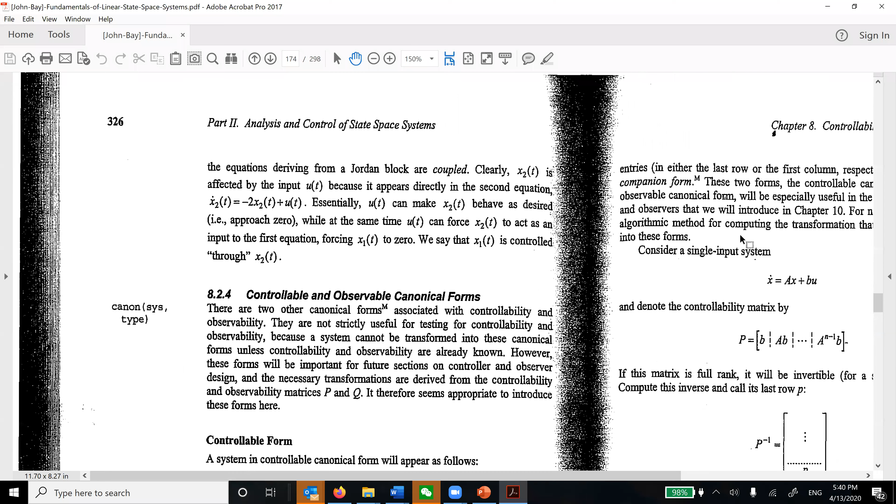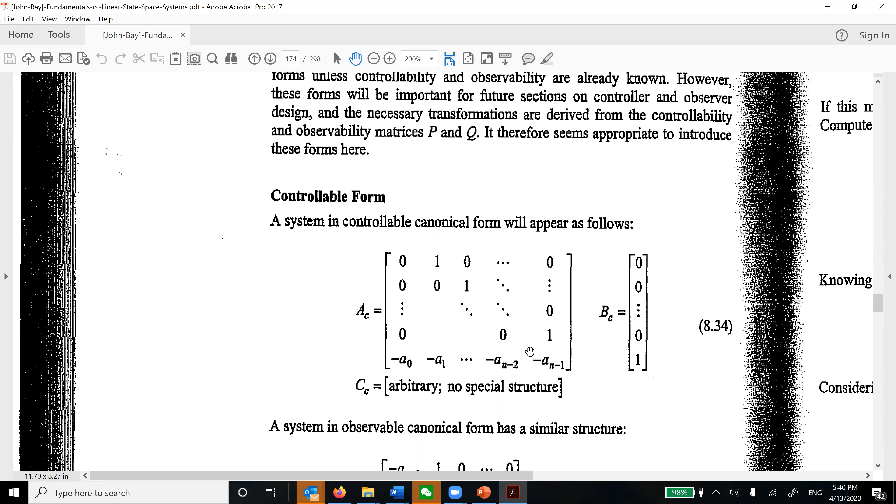So the reason I want to show you here is regarding similarity transformation: giving A, giving B, giving C, how I can change the state coordinate system, have a similarity transformation matrix, how to construct that matrix to turn it into a controllable form. We have seen this: AC, BC is a controllable form.

You can also do observable form. You can swap this one to this side, it doesn't matter, you can change that. So don't feel this is strange.

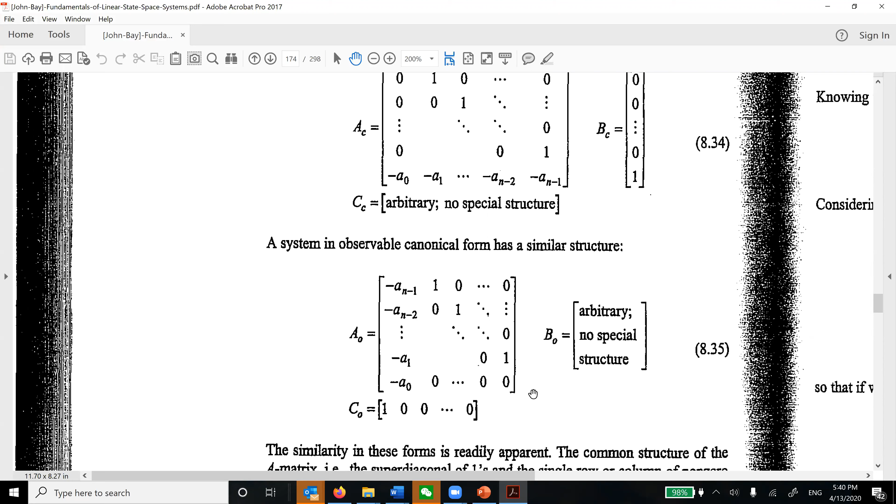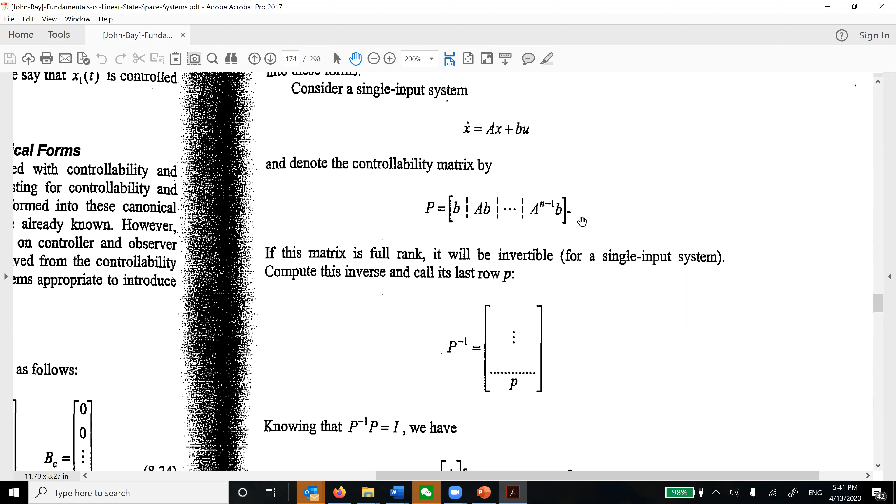But the question is how I can find out, giving A and B here, the similarity transformation. So basically this is original A and B, and how I can get AC and BC, the controllable form. Let's assume our controllability matrix is B, AB, ..., A^(n-1)B. So this is a matrix, and full rank means controllable, of course. So you can write the controllable form. It's invertible. We have a single input system here just for simplicity.

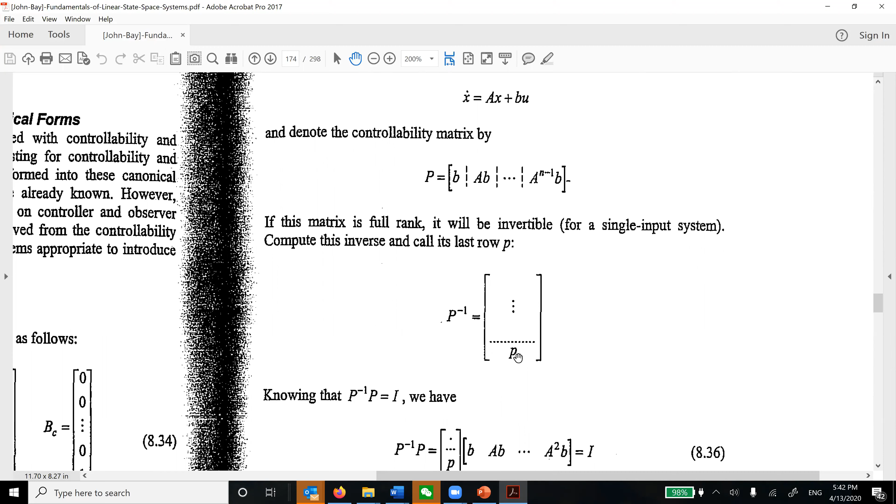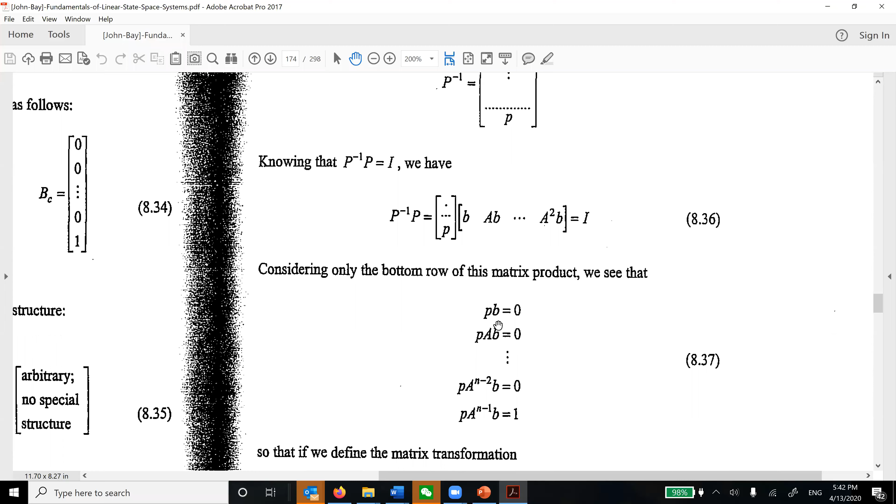So then we assume that P inverse can be written such that the last column is P, last row is P, and then P inverse times P. We know that something times this one is I. So then we can just do the math, because everything will be 0 until P times A^(n-1) is 1. From there you can get the matrix transformation.

You assume U inverse is P like this. Then you do U inverse times B, you make B only the last column equal to 1. We assume this U inverse, the U itself is U1, U2, ..., UN, and this is the identity matrix. So then you are trying to construct U1, U2, ..., UN this way, so this comes to the identity matrix.

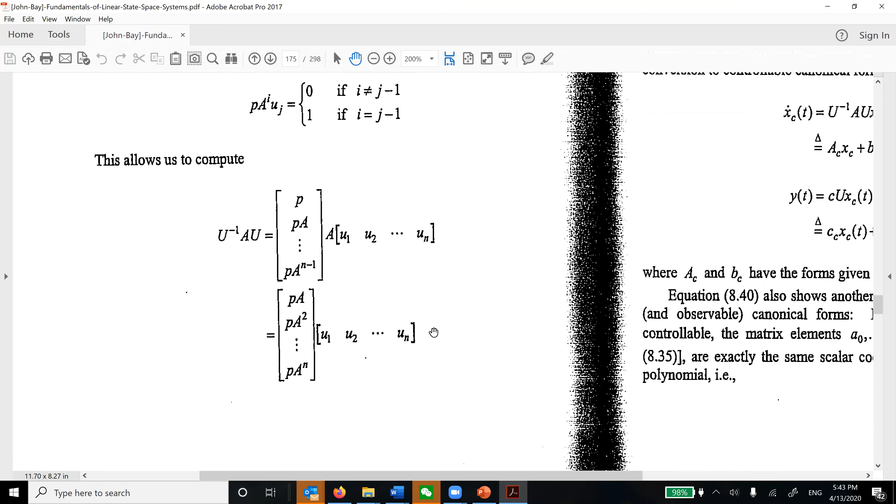So implying that P, A^i, U_j is 0 if i is not j minus 1, and 1 if it is. So that's the case. In other words, if you do the transform, this is U inverse A U here. We are going to get into the transform of the states and end up with this one.

So it's some argument. You can see that original is A, how you can get it to AC: you use U inverse and U here. That's the way you should do it. And U inverse B, you already know that is BC. That's AC.

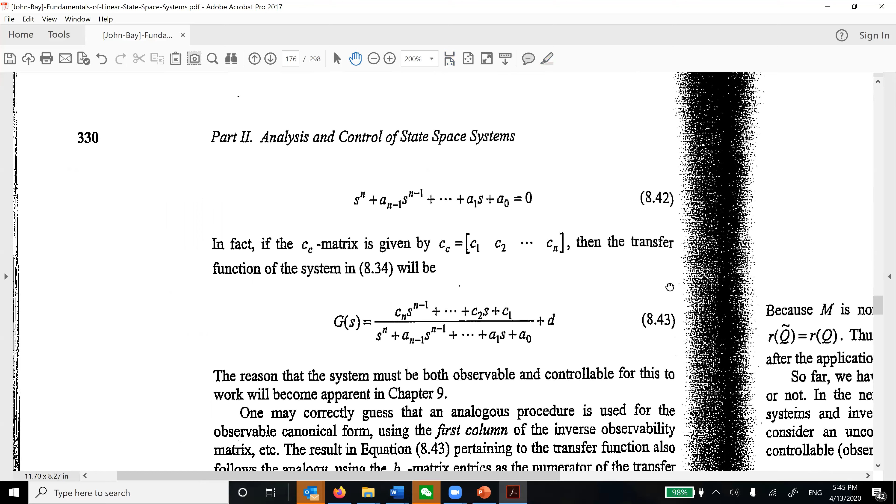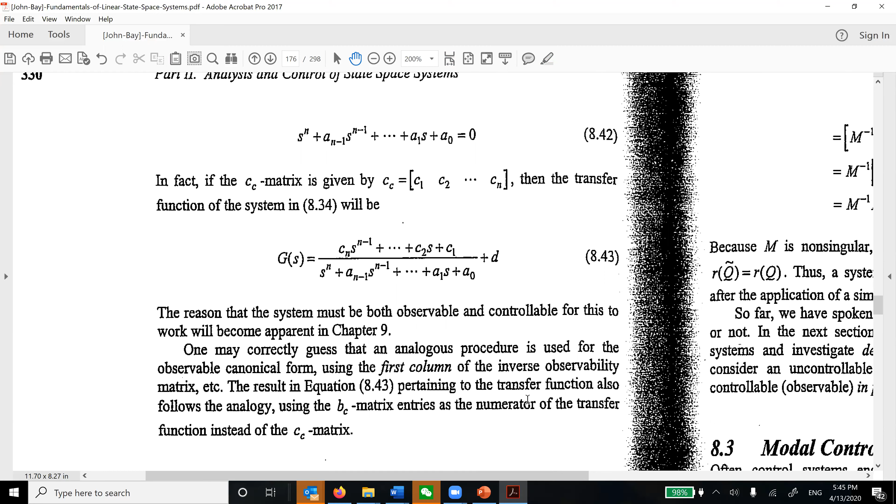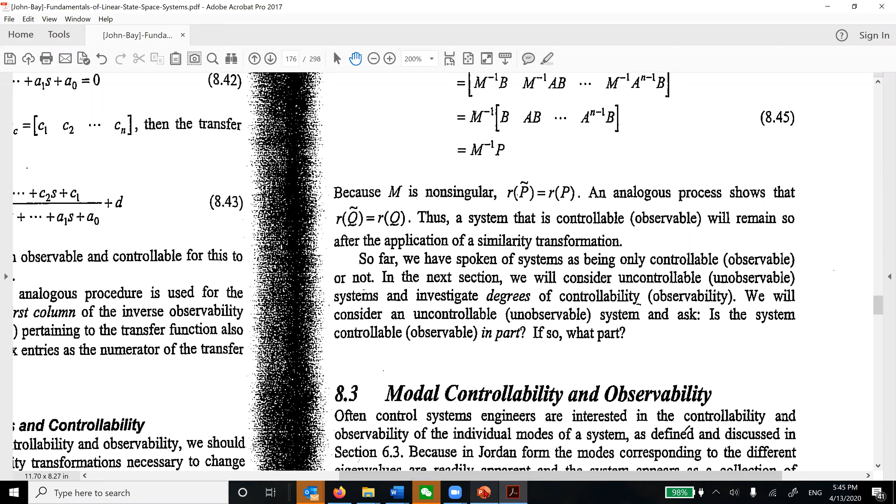So giving this one, and giving all these derivations, you can start to construct the similarity transform. Here it is: this is B, is the P matrix. You write the P-tilde matrix like this because you do similarity transform, you get this one. So this is under similarity transformation. We talked about modal controllability and observability before, but this equation was not given in that textbook. I thought they gave it, but you have to probably verify yourself.

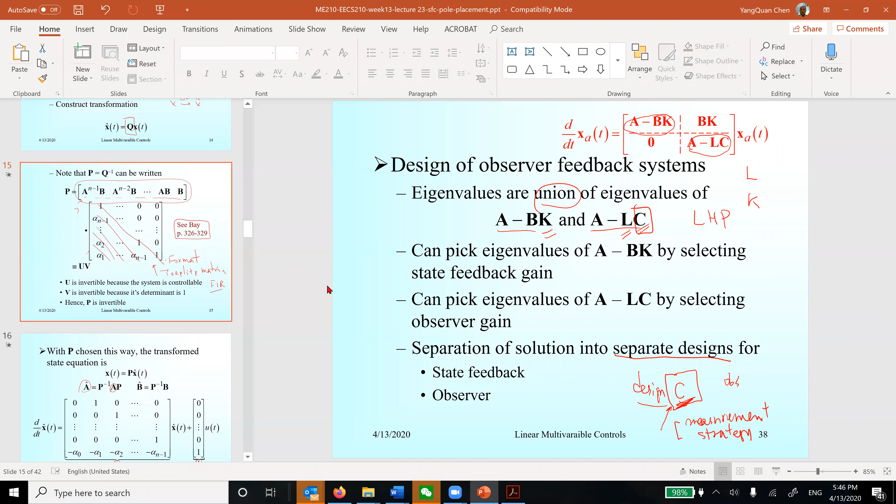This is interesting, the derivation about how you can construct... so this is U, this is V. So then how to construct this similarity transform matrix P. Don't try to memorize this, it's a fact, it's a beautiful format.